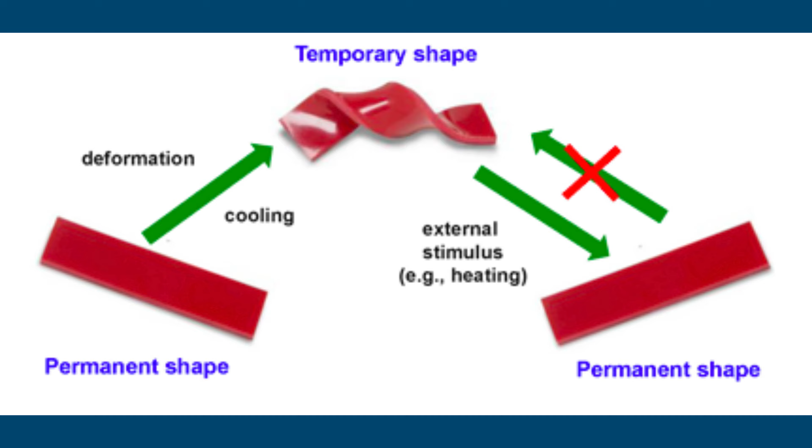Shape memory materials are capable of recovering a predefined permanent shape from a temporary deformed configuration when stimulated by external triggers. This phenomenon, known as the shape memory effect, SME, was first observed in metallic alloys in the early 20th century and has since been widely studied in alloys, ceramics, polymers, and composite materials.

Elastomers represent a special class of polymers characterized by rubber-like elasticity and viscoelastic behavior. According to the ASTM definition, elastomers are natural or synthetic polymeric materials capable of undergoing large reversible deformations and returning rapidly to their original shape once the external stress is removed. Their low glass transition temperature, Tg, flexibility, and high extensibility provide advantageous properties such as chemical resistance, durability, excellent adhesion, and good electrical insulation.

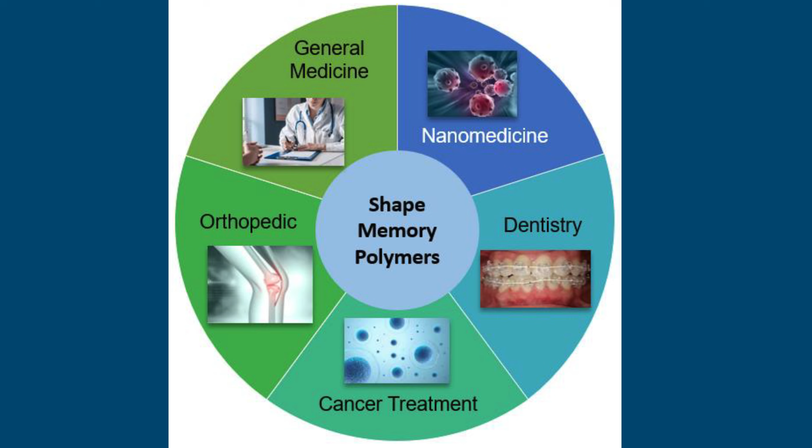The integration of the shape memory effect into elastomeric networks produces shape memory elastomers, which combine the flexibility and elasticity of elastomers with programmable shape recovery. Compared with traditional shape memory alloys or ceramics, SMEs generally exhibit lower density, higher deformability, improved cyclic stability, and easier processing. Consequently, they are increasingly explored for applications in soft robotics, intelligent textiles, biomedical devices, aerospace structures, and emerging technologies such as 4D printing, where objects change shape over time in response to environmental stimuli.

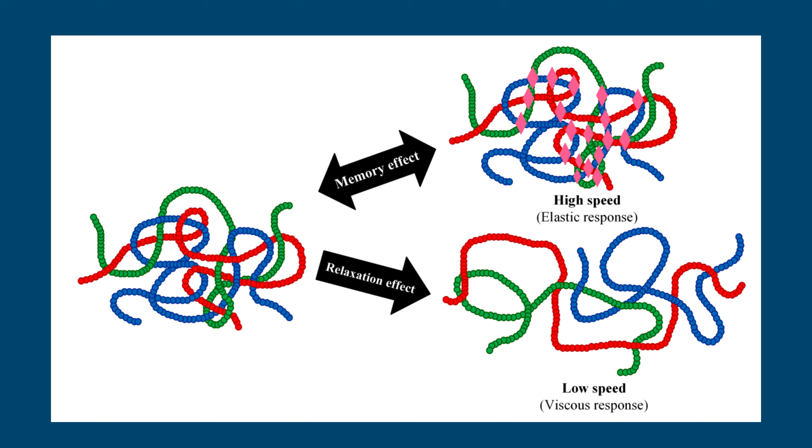Molecular design and mechanisms of shape memory elastomers. Fundamental shape memory mechanism. The shape memory behavior of elastomeric polymers arises from their molecular architecture and thermodynamic behavior. Key factors governing the shape memory response include molecular structure and chain orientation, crystallinity and phase morphology, cross-linking density, intermolecular interactions, and programming conditions. The programming process typically involves mechanical deformation at elevated temperature.

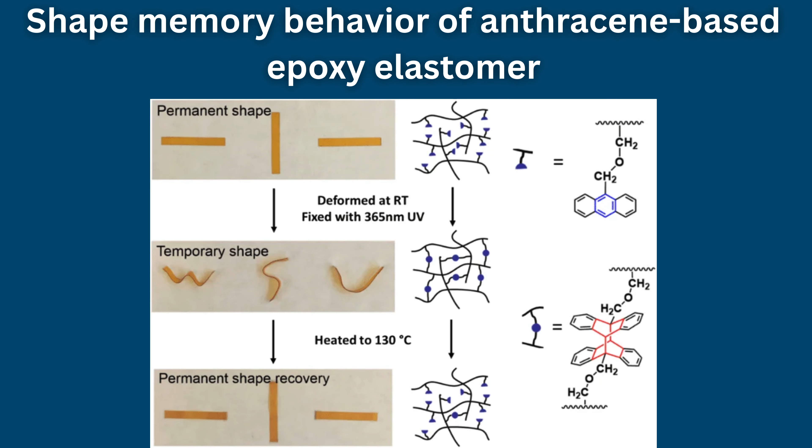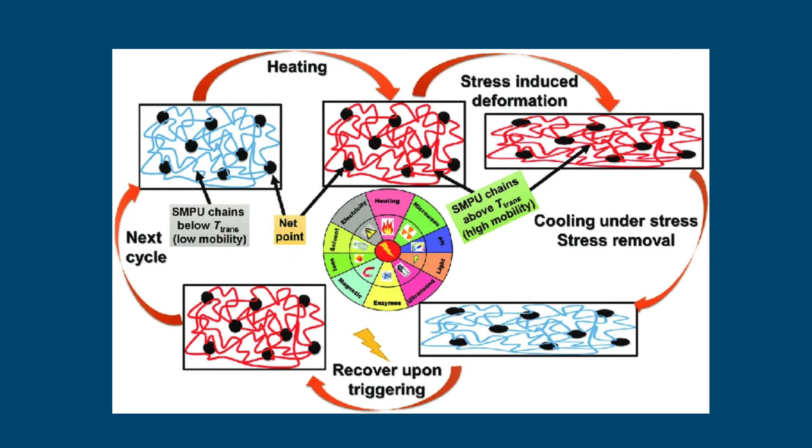The polymer is first heated above its transition temperature, either Tg or melting temperature, Tm, allowing polymer chains to become mobile. Mechanical deformation is then applied to produce a temporary shape. Subsequent cooling below the switching temperature, Ts approximately equals Tg or Tm, immobilizes the molecular chains, fixing the temporary configuration. When the material is reheated or exposed to another appropriate stimulus, molecular mobility is restored. The stored elastic energy within the network drives the polymer chains back to their lowest energy configuration, thereby restoring the original shape.

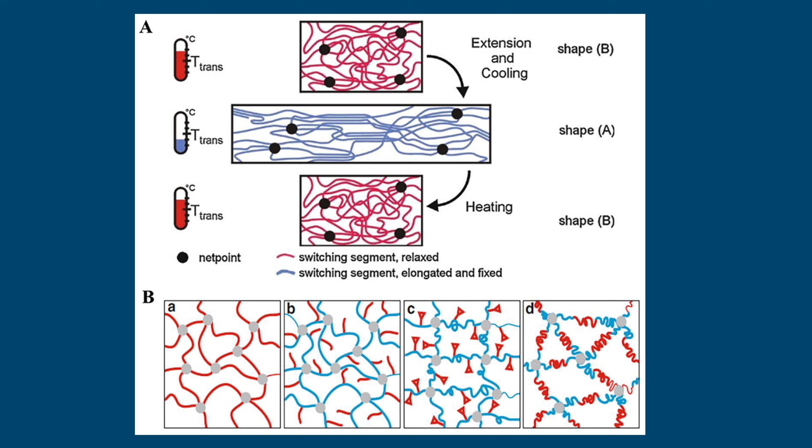Structural elements of shape memory elastomers. The molecular structure of shape memory elastomers typically contains two functional components. Net points, fixing phase: these are permanent cross-linked networks responsible for defining and stabilizing the permanent shape. Net points may arise from covalent cross-links, crystalline domains, or strong physical interactions. Switching segments, reversible phase: these segments undergo reversible phase transitions such as glass transitions or melting. They allow the temporary shape to be fixed and subsequently released when stimulated.

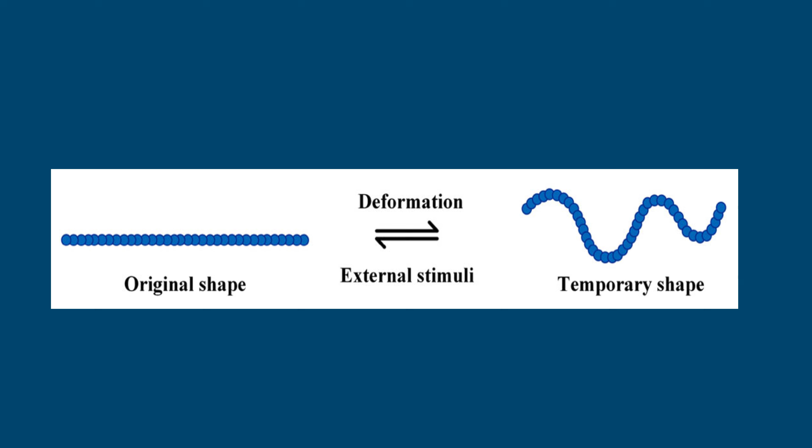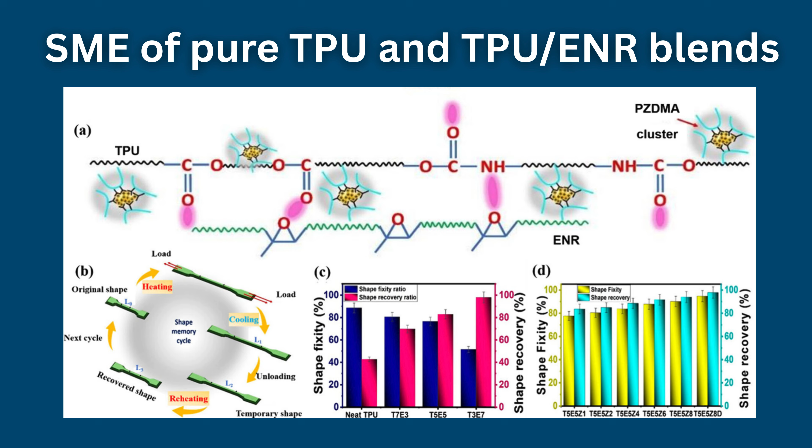Effective SME design requires that these two phases possess distinct transition temperatures and maintain good compatibility within the polymer matrix. The actuation performance can be optimized by controlling chain orientation, crystallinity, and the balance between amorphous and crystalline domains. Examples of common shape memory elastomer systems include polyurethane-based elastomers, silicone elastomers, e.g., PDMS networks, thermoplastic polyurethane, TPU, and polycaprolactone, PCL, elastomer networks.

Shape memory performance and classification. Dual, triple, and multiple shape memory effects. Shape memory elastomers can be classified according to the number of temporary shapes they can store. Dual shape memory effect, DSME: the polymer remembers one permanent shape and one temporary shape. This is the most common SME. Triple shape memory effect, TSME: the material can store two temporary shapes before returning to its original configuration.

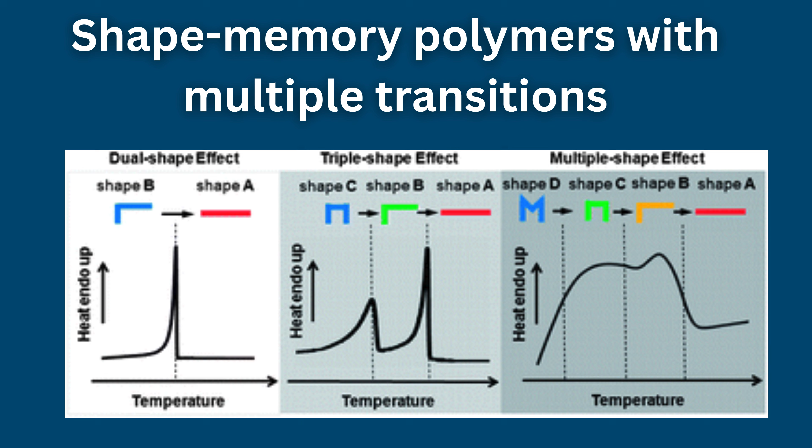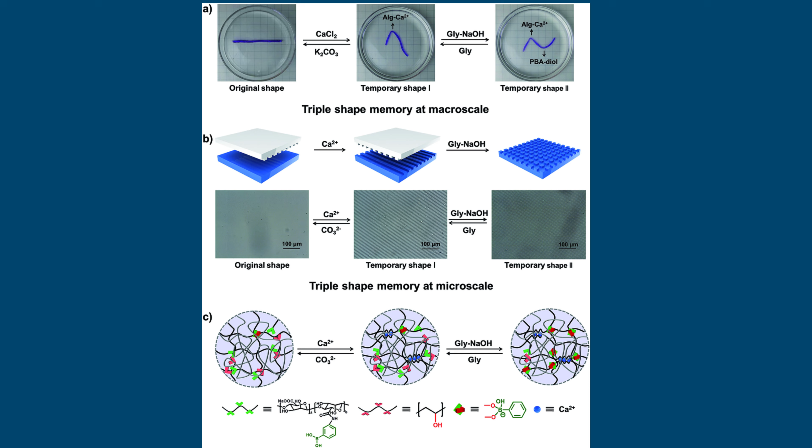Multiple shape memory effect, MSME: more complex systems can memorize three or more temporary shapes by incorporating multiple reversible phases with distinct transition temperatures. Achieving multiple SME behaviors requires precise molecular design because each additional reversible phase introduces extra phase transitions and reduces the proportion of each switching segment.

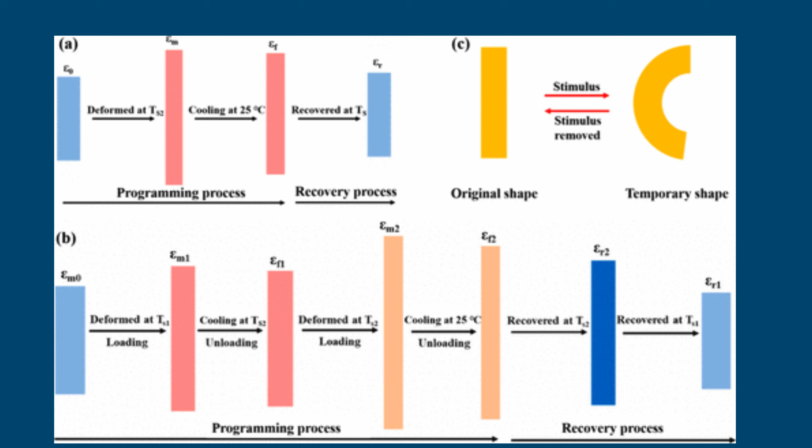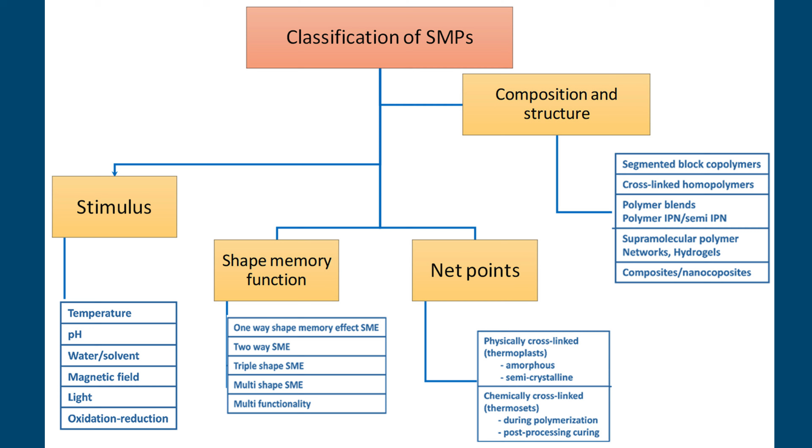One-way and two-way shape memory effects. SMEs are also categorized based on reversibility. One-way SME, 1W-SME: the material recovers its original shape when stimulated, but requires external programming to reintroduce the temporary shape. Two-way SME, 2W-SME: the polymer can reversibly switch between two shapes upon cyclic stimulation without external reprogramming. Two-way behavior is more challenging to achieve and often requires specialized crystalline or liquid crystalline polymer networks. Stimulus-responsive shape memory elastomers. Thermoresponsive shape memory elastomers.

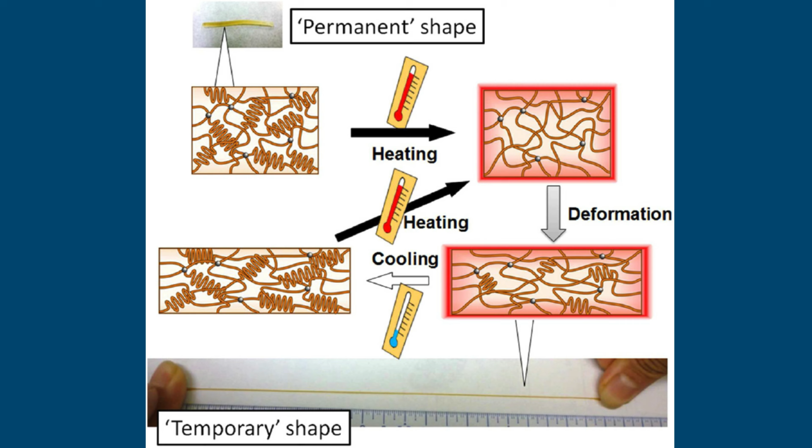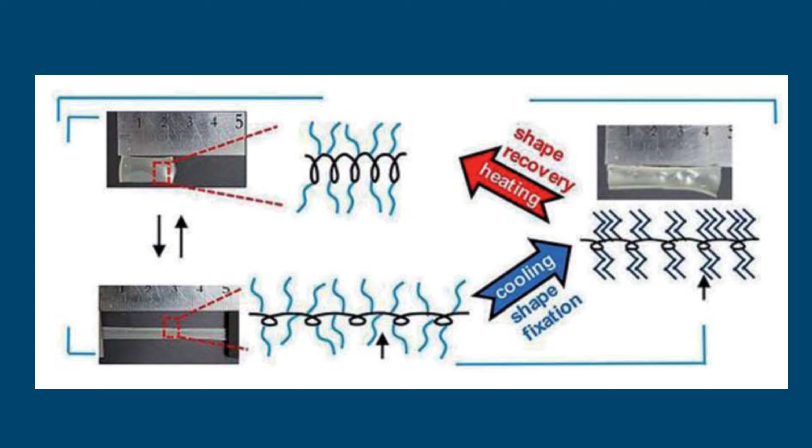Thermally activated SMEs are the most widely studied systems because temperature can easily trigger phase transitions. When heated above Tg or Tm, the switching segments become mobile, enabling recovery of the original shape. Typical thermoresponsive systems include polyurethane polycaprolactone elastomers, cross-linked polycaprolactone networks, and silicone elastomers with crystalline switching domains.

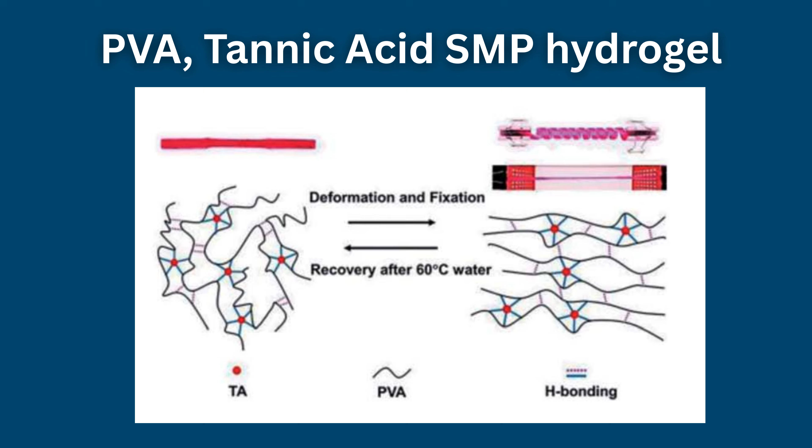For example, cross-linked PCL-based elastomers with melting temperatures near 45 to 60 degrees Celsius can be programmed into temporary shapes and recover their original structure upon heating.

Light-responsive shape memory elastomers. Light-responsive systems offer improved spatial and temporal control over actuation. These materials typically rely on photothermal conversion, where absorbed light is converted into heat to activate the SME. Photothermal agents frequently incorporated into elastomer matrices include carbon nanotubes, graphene, gold nanoparticles, and carbon black.

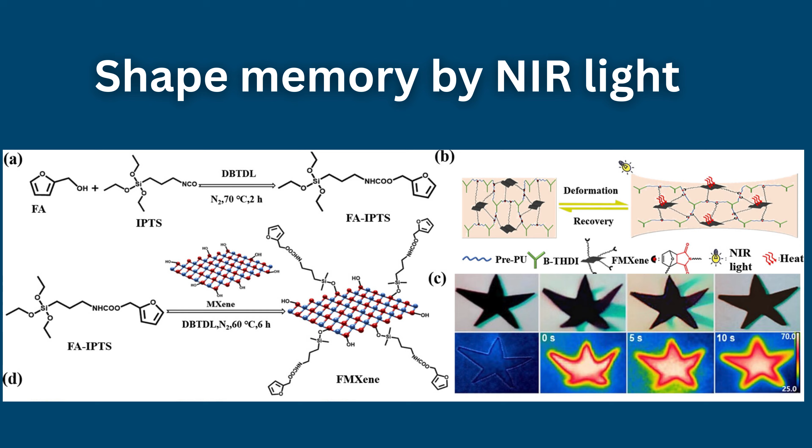Near-infrared (NIR) radiation is commonly used because it penetrates materials and biological tissues efficiently. NIR-triggered SME systems have been demonstrated in biomedical implants and remote-controlled soft robotic devices.

Electro-responsive shape memory elastomers. Electrically responsive SMEs rely on conductive fillers to generate Joule heating when voltage is applied. This heating raises the material above its transition temperature, triggering shape recovery. Common conductive additives include carbon nanotubes (CNTs), graphene oxide, carbon black, and metallic nanowires.

For example, a composite of thermoplastic polyurethane (TPU), polylactide (PLA), and multi-walled carbon nanotubes (MWCNTs) can achieve rapid electrical actuation with recovery efficiencies approaching 90% under moderate voltages.

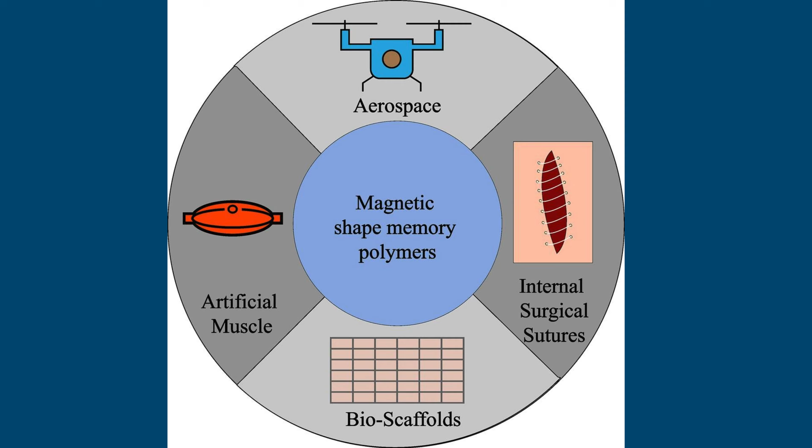Magneto-responsive shape memory elastomers. Magnetically responsive SMEs contain magnetic nanoparticles that generate heat when subjected to alternating magnetic fields. This heating activates the switching segments and triggers shape recovery. Typical magnetic fillers include magnetite nanoparticles and maghemite nanoparticles. These systems are promising for wireless actuation, particularly in biomedical applications where direct heating or electrical stimulation may be impractical.

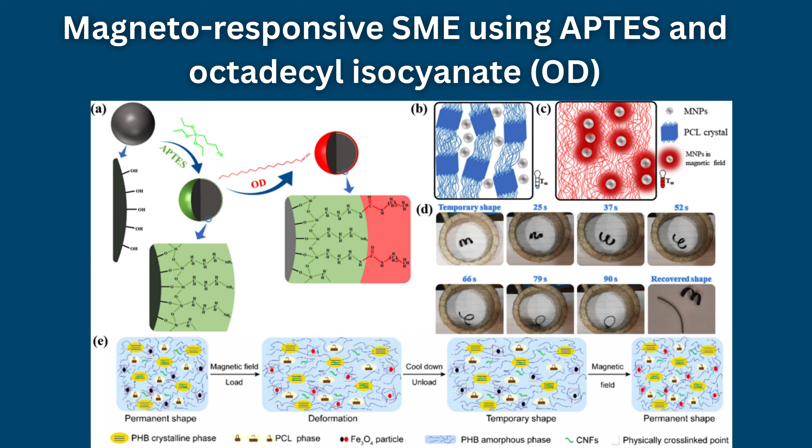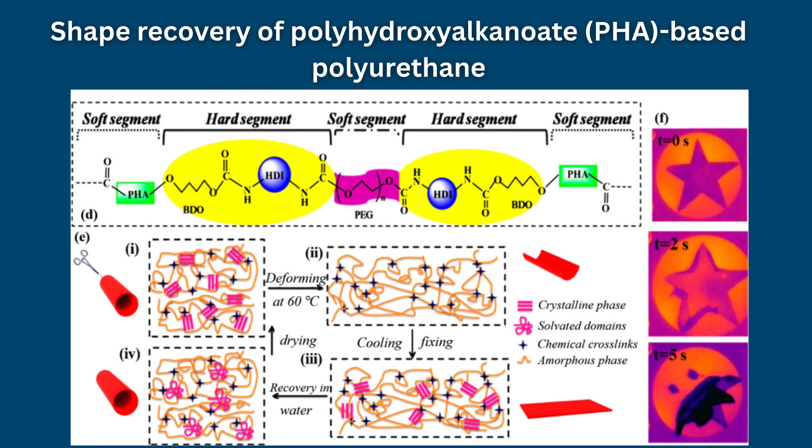Solvent-responsive shape memory elastomers. Solvent-responsive SMEs rely on swelling or plasticization effects induced by solvent molecules such as water. Solvent uptake increases chain mobility and lowers the effective transition temperature, enabling shape recovery. Such systems are attractive for biomedical applications because water is biocompatible and naturally present in biological environments.

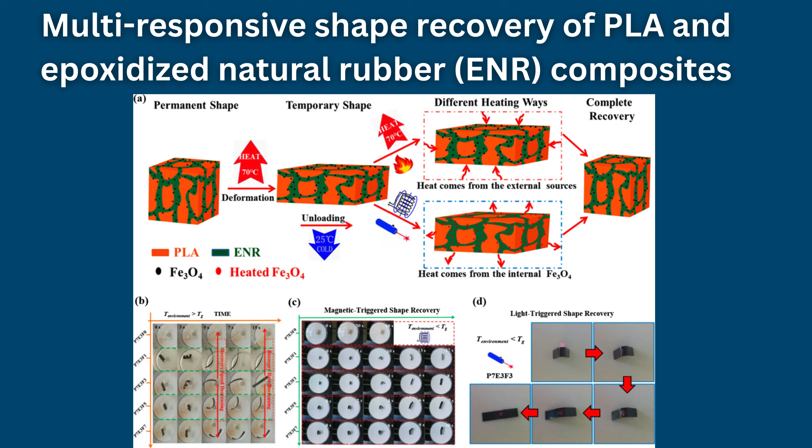Multi-responsive shape memory elastomers. Multi-responsive SMEs combine several activation mechanisms within a single material system. These materials can respond to combinations of stimuli such as heat and light, heat and magnetic fields, electricity and light, humidity and temperature. Such systems expand the functional range of smart materials and enable advanced applications in adaptive structures and programmable materials. Applications of shape memory elastomers.

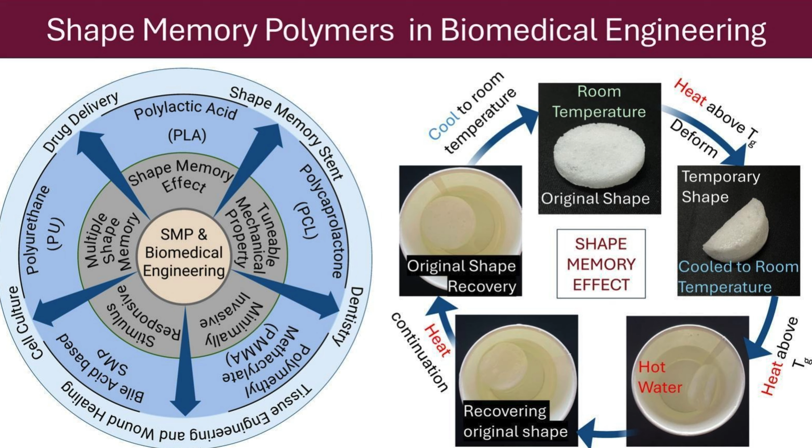Biomedical devices. Shape memory elastomers are particularly attractive for biomedical engineering because of their flexibility and biocompatibility. Applications include self-expanding vascular stents, minimally invasive surgical tools, drug delivery systems, artificial muscles and tissue scaffolds. For instance, biodegradable PCL-based SMEs have been explored for implantable devices that expand to functional shapes once inside the body.

Soft robotics and actuators. SMEs are widely studied for soft robotic systems that require lightweight and flexible actuators. Their large deformation capability and high recovery force make them suitable for soft robotic grippers, artificial muscles, and adaptive robotic components. Silicone-based SMEs reinforced with carbon nanotubes have been used to create remotely actuated robotic devices.

Aerospace and deployable structures. In aerospace engineering, shape memory elastomers enable lightweight deployable structures such as self-deploying antennas, morphing aerodynamic surfaces, and compact satellite components. These systems can be launched in compact shapes and activated to deploy once in orbit.

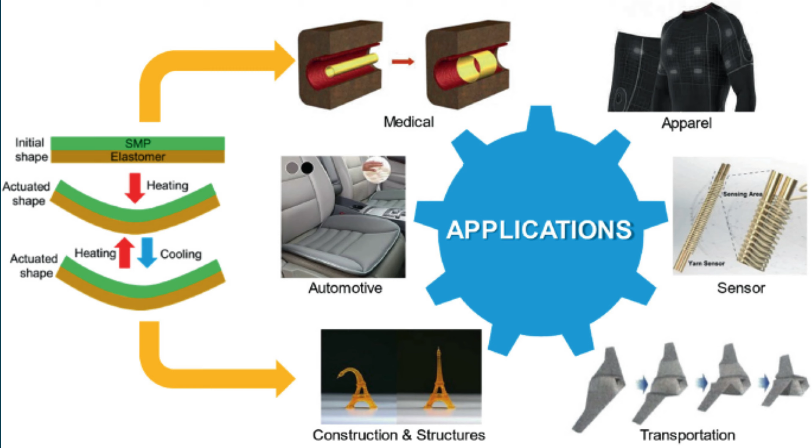Smart textiles and wearable devices. SMEs are increasingly integrated into adaptive textiles capable of responding to temperature or humidity changes. Applications include self-adjusting garments, wearable sensors, and responsive protective clothing. 4D printing and programmable materials.

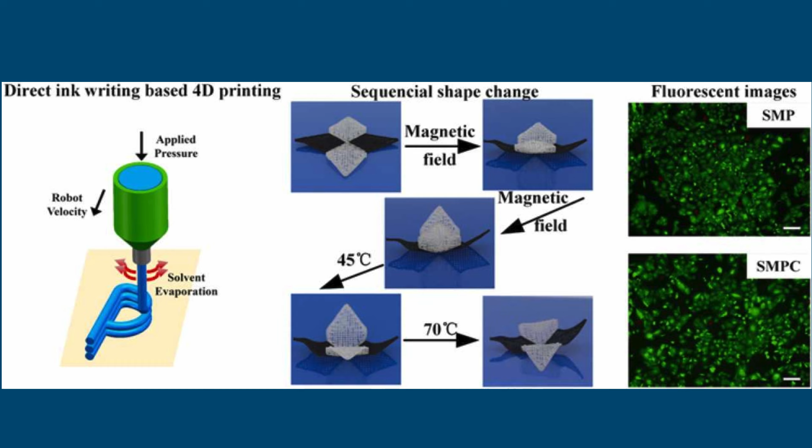One of the most exciting developments is the use of shape memory elastomers in 4D printing, where printed objects change shape over time in response to environmental stimuli. Such materials enable programmable structures capable of dynamic transformation.

Challenges and future perspectives. Despite their significant potential, several challenges remain in the development of shape memory polymers. These include improving mechanical strength, enhancing recovery efficiency, achieving precise stimulus control, and developing scalable manufacturing techniques.

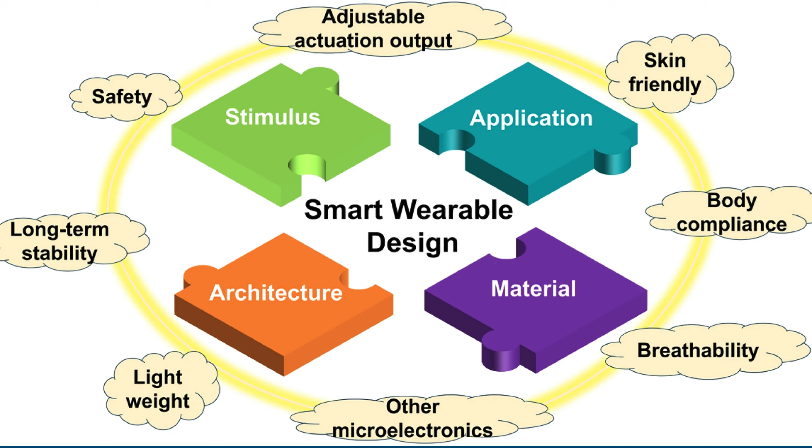Furthermore, complex SME behaviors such as multi-responsive and two-way shape memory effects require a deeper understanding of polymer network architecture and molecular dynamics. Future research is expected to focus on advanced molecular design strategies, nanocomposite reinforcement, and integration with emerging technologies such as flexible electronics, biomedical implants, and adaptive robotics.

Conclusion. Shape memory polymers represent a rapidly evolving class of smart polymer materials that combine large elastic deformation with programmable shape recovery. Their unique molecular architecture, consisting of permanent cross-link networks and reversible switching segments, enables controlled transformation under various stimuli, including heat, light, electricity, magnetic fields, and solvents.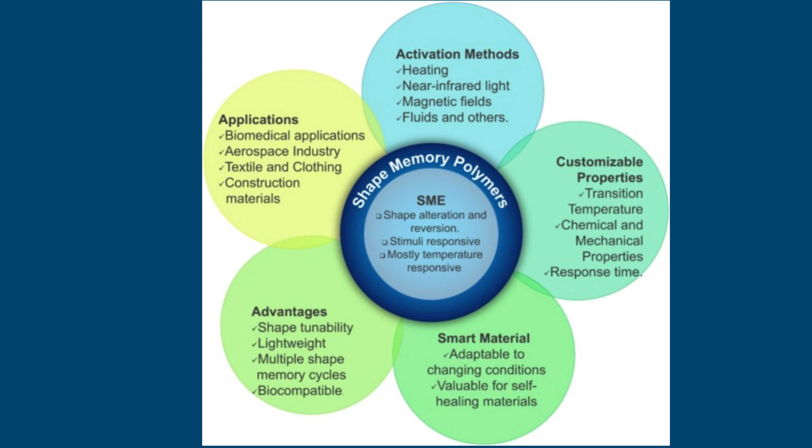Because of their flexibility, durability, and responsiveness, SMPs are expected to play a crucial role in next-generation technologies ranging from biomedical devices and soft robotics to aerospace structures and intelligent textiles. Continued advances in polymer chemistry and materials engineering will further expand the capabilities and applications of these versatile smart materials.